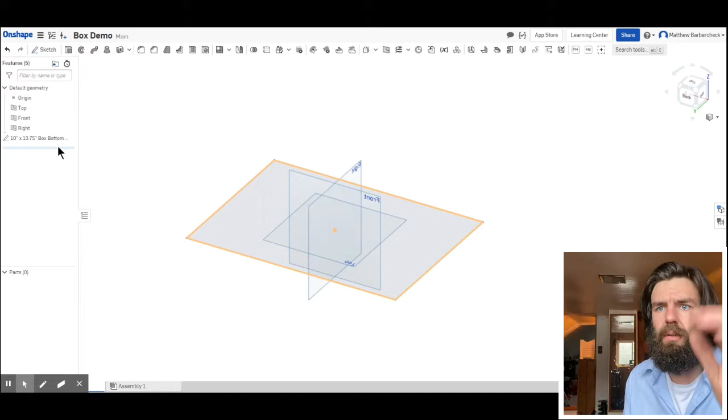Hold down your right cursor. It'll rotate things. Hold down your middle scroll wheel and you can pan things. Zoom in and out on your scroll wheel. So in this video, I'm going to be extruding the walls of the sheet metal box and thickening the bottom. So in our sketch, here's our defined rectangle, 10 by 13.75 inches. And what we're going to do is extrude that up and really create the box shape.

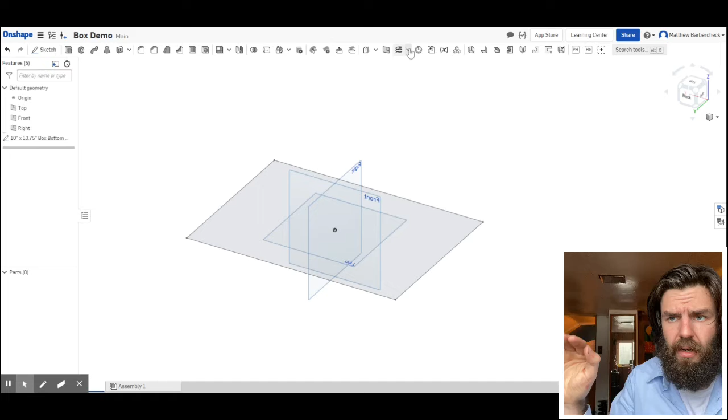At the top 3D toolbar on the right side are sheet metal specific tools, and we're going to click sheet metal model. I'm going to select thicken. On the top menu bar, you got convert, extrude, thicken. Those are different sheet metal options. We're not going to get into all of those, but I'm going to just go straight to thicken.

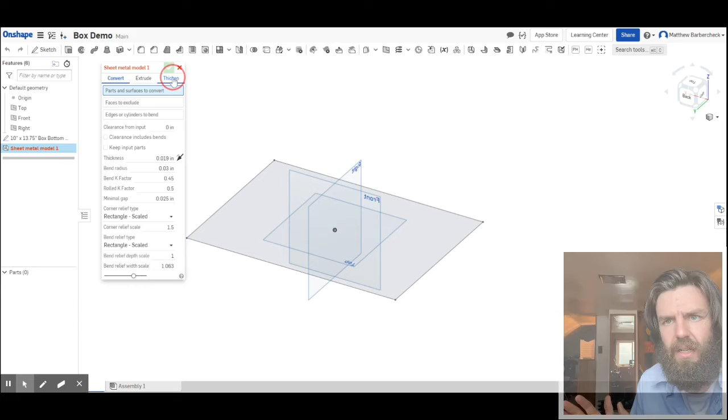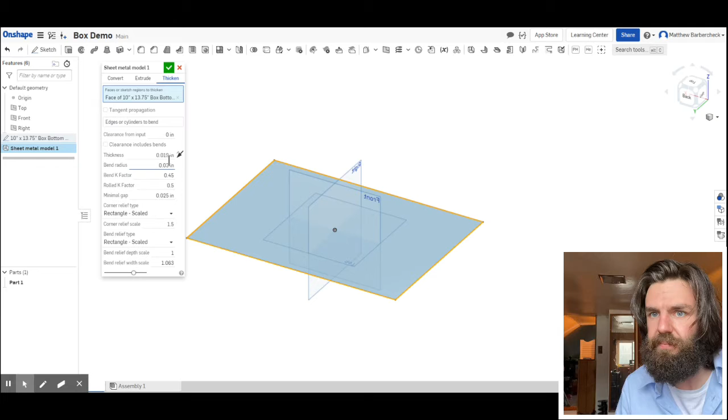I'm going to select what goes into that blue rectangle first. You can do that by clicking the rectangle that's in your model space, or going to your design tree and clicking the 10 inch by 13.75 inch sketch. Either way works. Here, I click the rectangle. If you ever click the wrong thing in the blue box, there's a red X. Click that. Do it again. Check your settings. You may want to pause the screen and make sure that your settings match my settings.

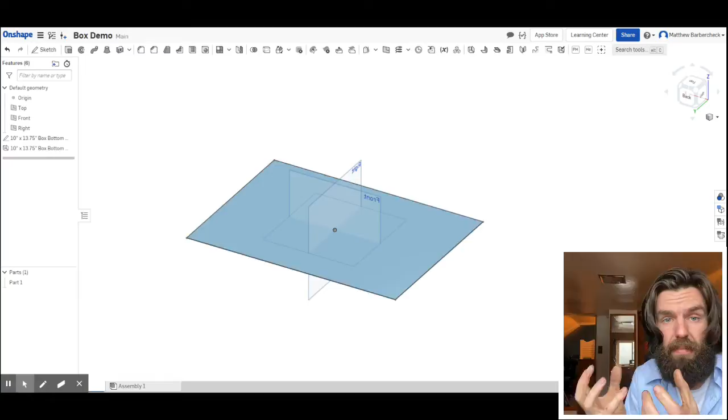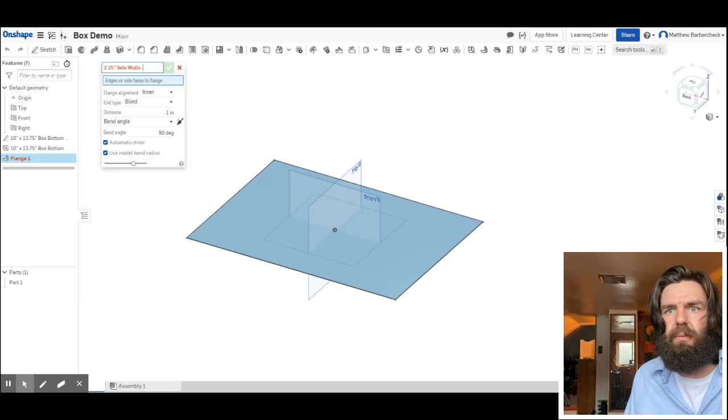Hit the green check mark. Finally, there we go. We've got the box bottom. You can see it. It's got depth. It looks like you can maybe even reach into the screen and grab it. Side walls are going to be the longer ones, and our end walls are going to be the shorter ones. And we're going to bring them up using the flange command, also found in your sheet metal tool area. Just click flange. I'm going to go ahead and name this 2.25 inches sidewalls flange. Again, just building that rote memory of the vocabulary and terminology.

I'm going to click these two edges. That puts those two edges in that blue box. Notice how two more new things are in my blue box in that mini menu, that mini window that pops up. Now what we're going to do is make sure that these walls are extruded the right height. The settings in this mini window for the flange command, they're asking for your flange alignment, your end type. We're going to select blind and change that setting to 2.25. And we're going to adjust nothing else.

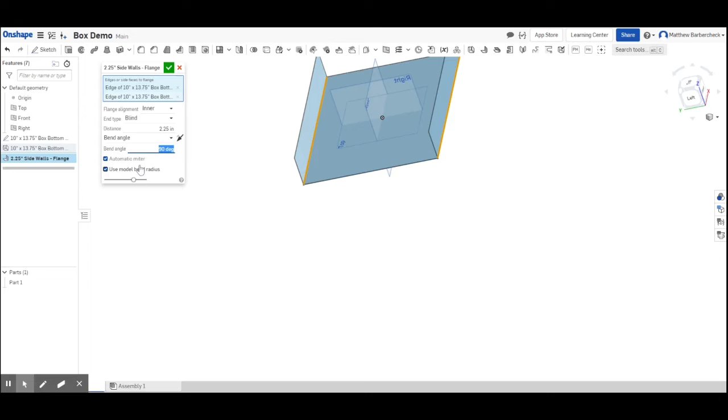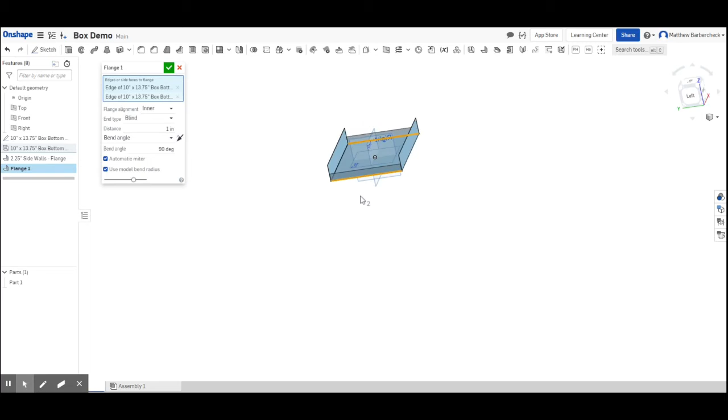We're going to do the exact same process and the exact same steps to the end walls. So using my flange command found up there by my sheet metal tools, I'm going to go ahead and select the two edges that I want to flange up to form our end walls. See them pop up in our blue rectangle in our little mini window there. And I'm going to go ahead and make sure to name the end walls. In the event that the walls go the opposite direction than mine, look at that double arrow option in the mini window, click it, and it will flip the orientation.

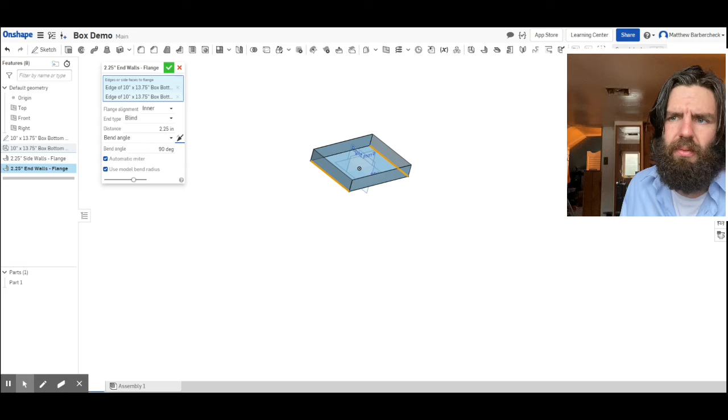Hit the check mark, and it should bring up your end walls to the exact same height as your side walls. And real quick, check out this bonus. Come over here to the right, click that bottom button, should say like flat view or something like that. Boom. That's pretty cool. We'll get more into that.

By the end of this video series, you'll be able to design and customize your own box plans to manufacture. Coming up ahead, we'll be adding the corner folds to our box, adding the lid and hems. You'll see that flat metal plan generate itself and update based on changes we make to the three-dimensional plan, which is a pretty cool feature. We're really getting into some powerful features already. I hope you're retaining as much of it as you can, and soon you'll be able to apply as much creativity as you can.